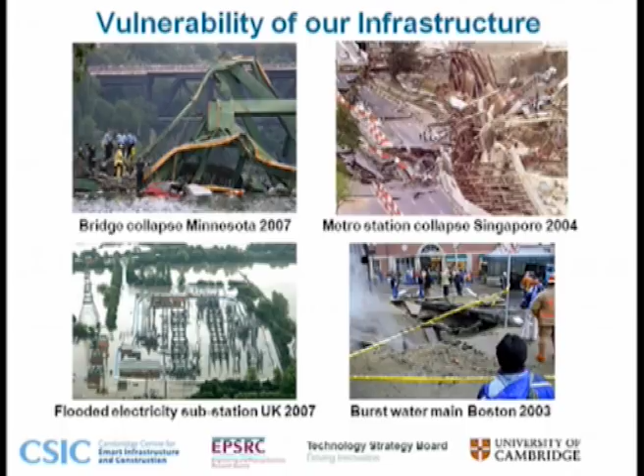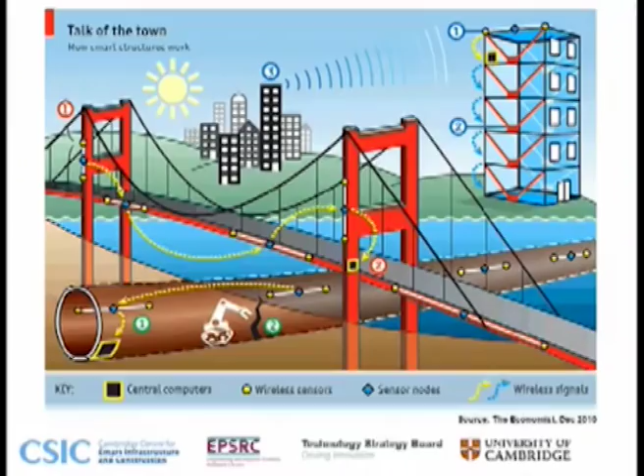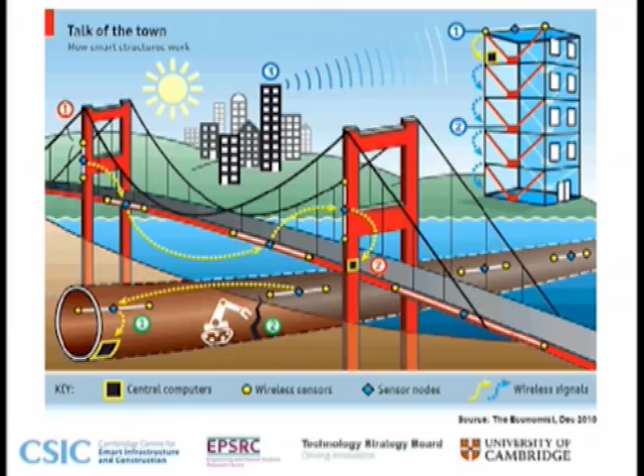Now, The Economist magazine got interested in this subject a couple of years back, and they came, in fact, and talked to us at Cambridge, and they ran a whole article, quite a large article, about smart infrastructure. And they recognized the interest and importance of having urban infrastructure equipped with sensors using the latest technologies to actually tell us an awful lot more about how our infrastructure is performing, both in the terms of old existing infrastructure, whether they be bridges or tunnels or anything else, but also how we can actually improve hugely the process of constructing and producing our infrastructure, which is, after all, a very expensive business.

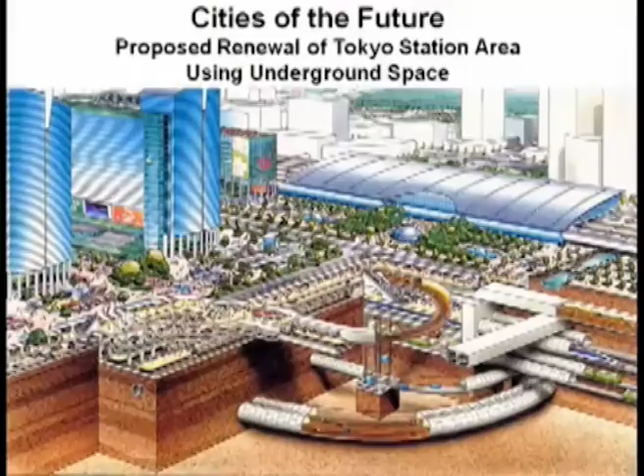And indeed, this reflects my own personal interest more in that a lot of what I do is concerned with underground infrastructure. But there is more and more the likelihood that many of our large cities of the future will be making increasing use of underground space. And this is a proposal that's being put into practice quite soon in the Tokyo station area, making much, much more radical use of underground space. But in order to do that, we need to understand much more about what we can do and how we can do it, and we need to be using some new technologies, particularly sensor technologies, to tell us that. So I'm going to give you a brief overview of several aspects of what we've been concerned with at Cambridge.

The first is in terms of innovative distributed strain fiber optic sensing. Now, many of you will be familiar with fiber optic sensing using fiber Bragg gratings, where one can put specific gratings at certain points along an optical fiber to measure strain at discrete points. But there are now very exciting new developments whereby one can, by using distributed strain Brillouin techniques, by shining a light source down the optical fiber and measuring the backscattered signal, one can actually get the strain continuously all the way down the optical fiber.

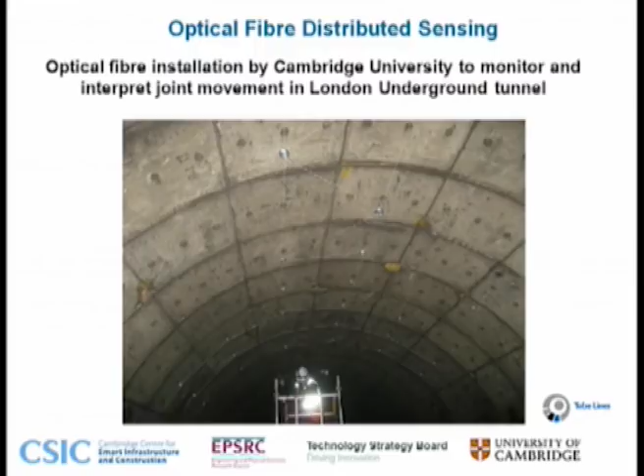And one example of this recently has been an installation in a London Underground tunnel to monitor and interpret joint movements in that tunnel. And you can see here in the photograph the white optical fiber which has been stretched along the tunnel, and we can get the complete strain distribution all the way along that optical fiber, and that has informed in a way that's never been done before as to exactly what the mechanism of movement on this particular tunnel is.

And this is a tunnel of some concern, but I should reassure you, particularly our visitors here today, that the entire London Underground system is safe, but this particular section has got some unexplained movements going on. And this use of optical fibers in a completely novel way to understand old infrastructure is a very exciting technology. And the Crossrail project, which is the largest civil engineering project in Europe at the moment, here in London, involving many kilometres of new tunnels and stations.

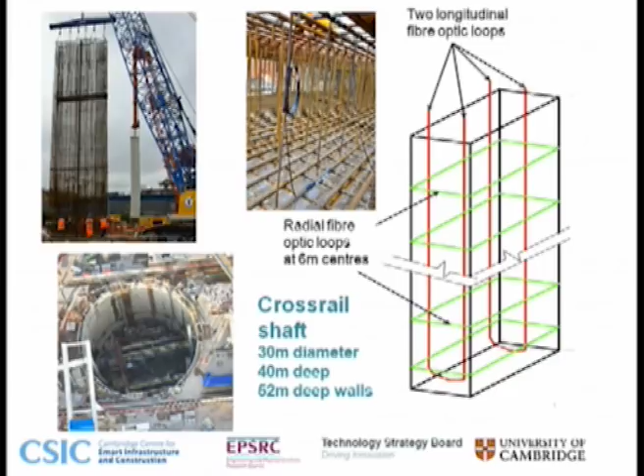And already we are finding that these have been designed in a much too conservative way. And so there are big economies that can be made, but still ensuring that the infrastructure remains robust.

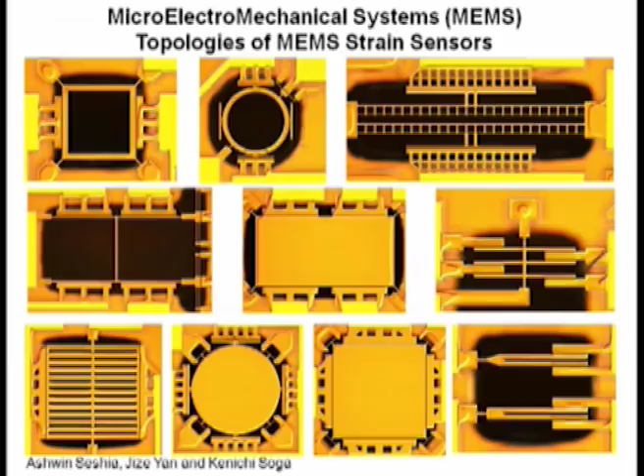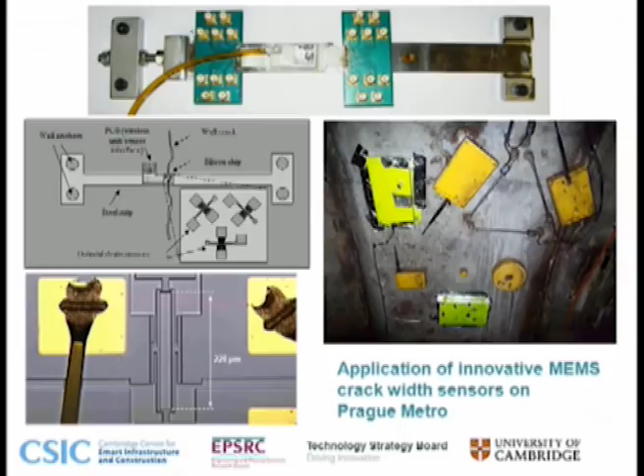And this is a very accurate and extremely useful way of measuring strain, which we're now implementing on a number of examples, including the Prague Metro, where they have got quite a lot of cracks. It sounds as if I'm only showing you tunnels that are in trouble, but in Prague they do have some problems there, and these MEMS sensors have really changed the way in which the owner and operator of the metro can understand what's happening to their infrastructure.

And of course, we're in a world of wireless networks, and that's changing things enormously because, again, in the context of tunnels, but it doesn't only apply to tunnels, it applies to flood defences or bridges, many other forms of our physical infrastructure, where wires leading from gauges are extremely troublesome and not at all desirable.

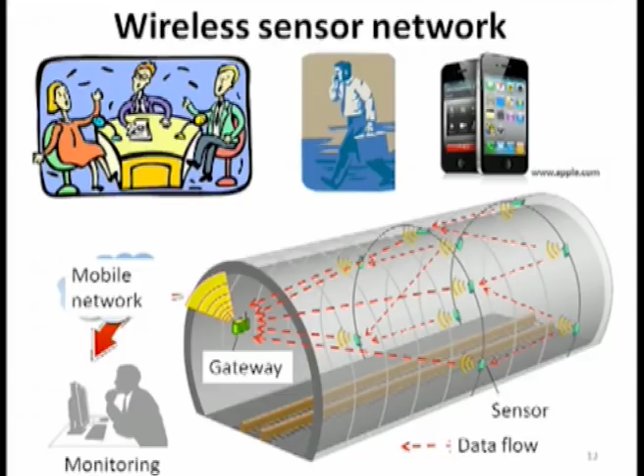But now we can have the principle of placing sensors of the right type into or onto our infrastructure, and they can take readings and they can beam their data to the adjacent sensor right on through to a gateway, and from that gateway to a mobile network. And so, properly designed, these can make an enormous difference to how we understand our infrastructure.

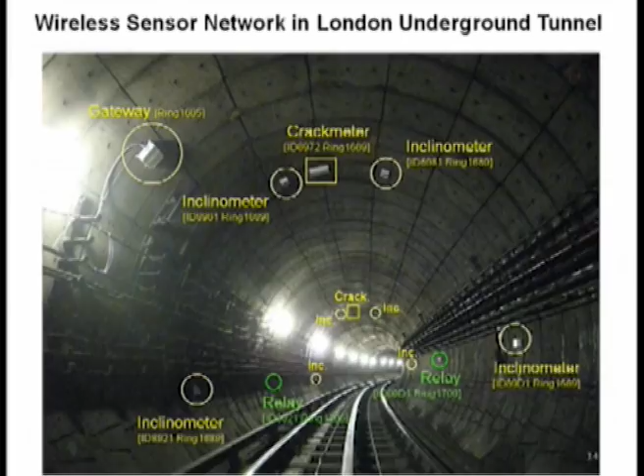And here again is the London Underground Tunnel, and what was done here was to place, you'll see there's a gateway shown there, and then a number of different devices, all wireless devices to measure cracks and inclination, placed at different places along the tunnel. And then, as I showed in the previous diagram, they can beam their data from each device to the gateway and to the engineers. And this is enormously attractive to infrastructure owners.

So there is a very big win here, because lots of our infrastructure, as I said earlier, is very old. But the question is, how is it performing? Is it good for another 10, 20, or 50 years? We can actually understand that now by using these technologies.

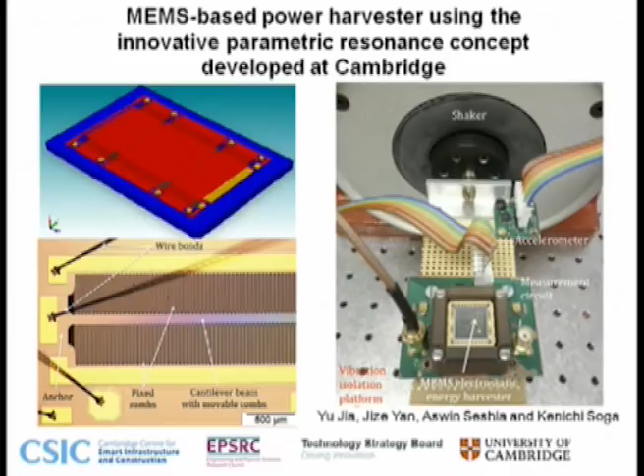Batteries are a problem in that they tend to have to be replaced. And so what we're also working on at Cambridge is using innovative power harvesting, such that the sensors that I've been describing will not need any batteries. And here is one particular example using parametric resonance concepts, which we've developed, where the actual vibration of the particular tunnel in question, or a bridge if there's traffic driving over it, will be sufficient to generate enough power to be stored in capacitors to be able to power the sensor.

So one has the prospect very soon of having wireless sensors that will not need batteries, because they can harvest their power not only from vibrations, but possibly also from wind and solar and other forms of energy.

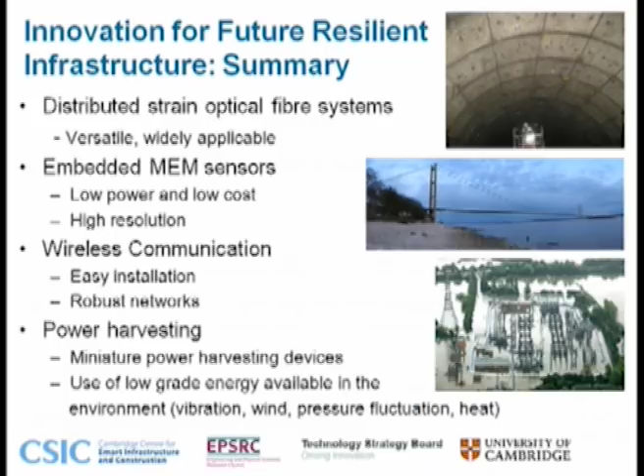So, just in summary, this is obviously only a very brief description I've given you. Firstly, there are some hugely big developments on distributed strain optical fiber systems, which are very versatile and widely applicable. I know of one example in Japan where highway embankments, which are thought to be rather unstable in one part of Japan, there are simply kilometers of optical fiber being used, at very low cost, but with enormously new understanding of what those embankments are doing.

Embedded MEMS sensors, they're low power, low cost and high resolution. Wireless communications, easy to install, robust networks, and finally, the prospect of power harvesting, where we can use miniature power harvesting devices and low-grade energy which is available in our environment, such as vibration, wind, pressure fluctuations, and even heat.

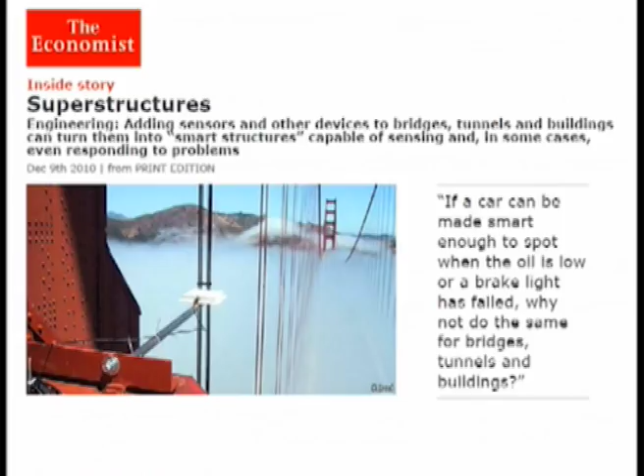So coming back finally to that article in The Economist, they finished up by saying, the quotation you'll see on the right-hand side there, that if a car can be made smart enough to spot when the oil is low or a brake light has failed, why not do the same for bridges, tunnels, and buildings? And of course, it's not only bridges, tunnels, and buildings. This applies to many, if not all, aspects of our physical infrastructure.

It could be critical pipelines, flood defences, nuclear power stations, potential landslides. The list is endless. And now is the time for us to engineer a smart, intelligent, more economic but resilient infrastructure.